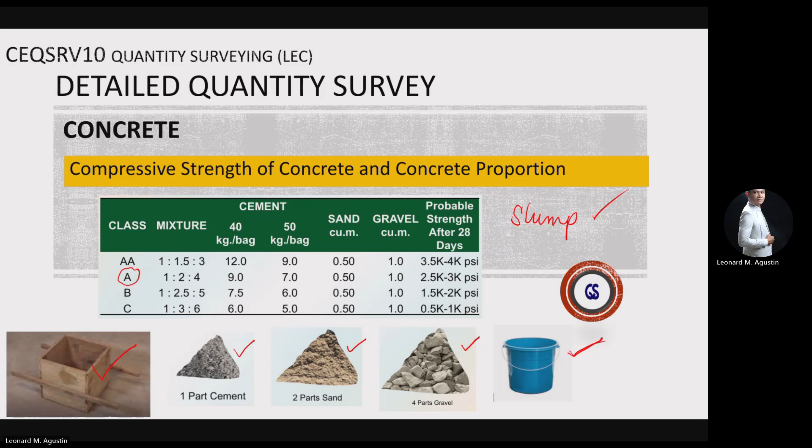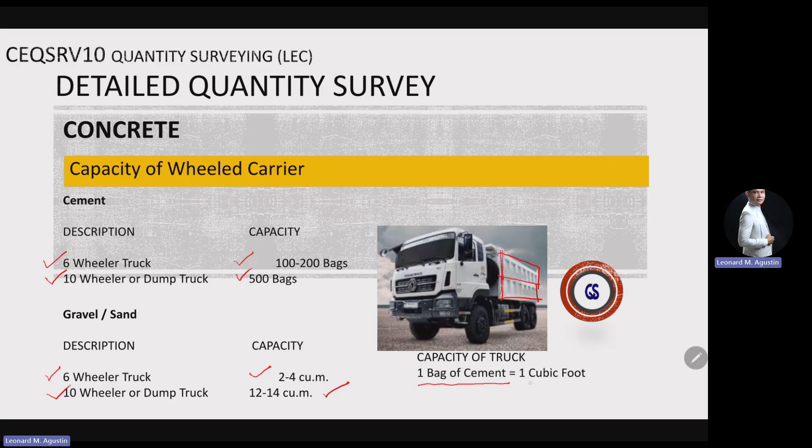So makikita na lang natin kung ano yung proportion dun sa pinaglagyan natin or dun sa container niya. So 1 bag of cement is actually 1 cubic foot.

Dun sa mga lalong-lalo na dun sa mga second taker and also dun sa mga first taker naman, I think alam na natin to kasi yun yung pinakaunang activity na pinagawa ko sa inyo dun sa laboratory. So concrete structure elements, we have your footing, the slab, so SOG or slab on grade or yung suspended slab natin, and then stairs, column, and then beam. Yung beam natin from grade beam, second floor beam, roof beam, and so on.

And if there are any other measurements or concrete structure elements na kailangan nating i-calculate, like say for example, mga parapet, wall, lalong-lalo na dun sa mga roofing natin to achieve a particular design, mga ramp, ano pa ba? So kailangan natin i-include dun sa concrete estimates natin. So note to include all portions below the natural grade line, mga footing, column, walls, and so on.

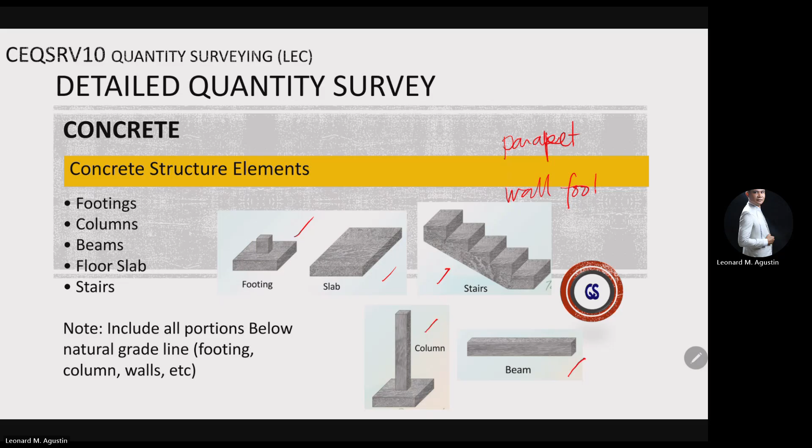Ang kulang pala natin dito is yung wall footing din. So basic lang naman, di ba, yung pag-calculate natin for concrete structures natin. So volume computations muna tayo bago natin siya i-appropriate dun sa proportions na either 1:2:4 na mga cement, sand, and gravel.

So very basic formula for volume of footing, length times width times its depth. So that is for footing. So isolated footing yung example natin dito. And if that's a combined footing, it's just the total length. Say, ito yung columns natin na dalawa. And so on. So very basic yung total volume of concrete calculations natin.

That is volume of footing times the number of footing, based from our foundation plan. Kung nasaan yung mga footing natin, we should count kung say for example, F1 ito, F1 ito, F1 ito, this is F2, F2, F2. So kung ano yung nakuha nating volume...

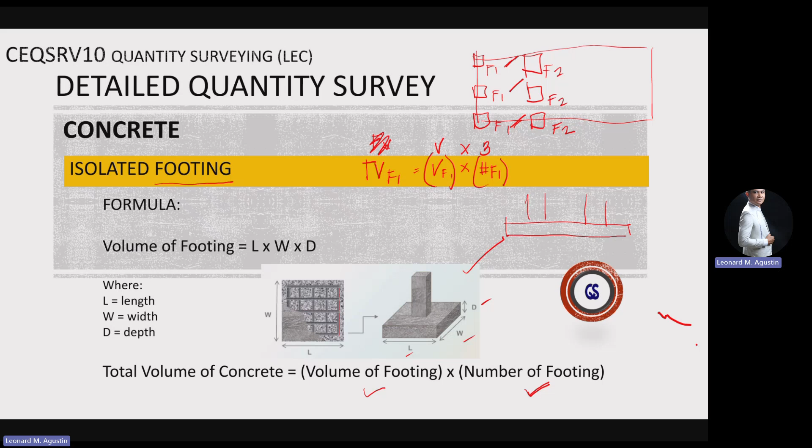So para ma-consider natin lahat ng F1 that is red dun sa ating foundation plan. And then, for concrete wall footing naman natin, basically that is for a hollow block section or any wall na kailangan nating lagyan ng footing underneath. So that's just this section in here: D times W, depth times the width of the footing, times yung length natin. So remember yung length natin.

Say for example, meron tayong mga columns dito. Tapos say for example, lalagyan natin ng wall footing ito kasi meron siyang wall. Tapos grade beam na tong mga nandito, grade beam. So we do not actually need to put wall footing dun sa mga grade beams natin kasi pwedeng dun na tayo mismo sa grade beam magsimula dun sa wall natin. Dun na natin ipapatong yung concrete hollow blocks natin, tapos dun na din tayo maglalagay ng mga abang.

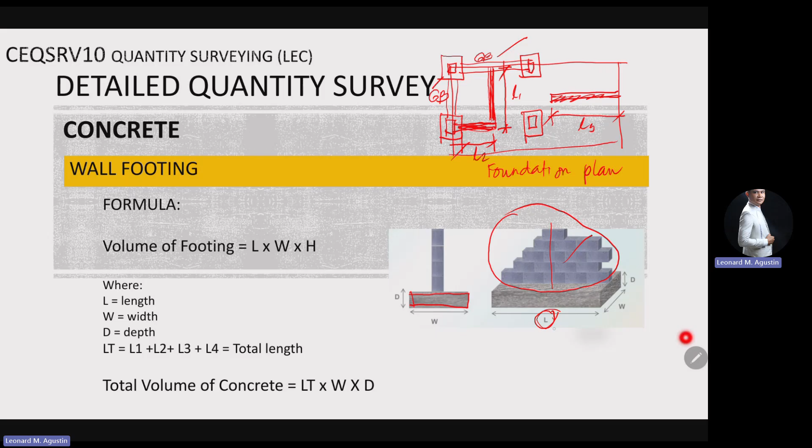So ang magiging length lang natin, titignan natin, i-inspect natin dun sa foundation plan pa rin natin, nasaan ba yung mga wall na kailangan may wall footing. So like say for example, this one, eto yung lalagyan natin ng wall footing. So yung length na yan, i-measure natin itong length na to plus this length. And if there are other lengths na kailangan natin lagyan ng wall footing, i-add lang natin dun sa L natin. So say L1, L2, L3, that will be the total length, L1 plus L2 plus L3. So yun yung total volume of concrete natin: total length times W times D.

To get the volume of our footing.

So wala tayong number of wall footing dito. It is per linear meter. Yung calculations natin dito.

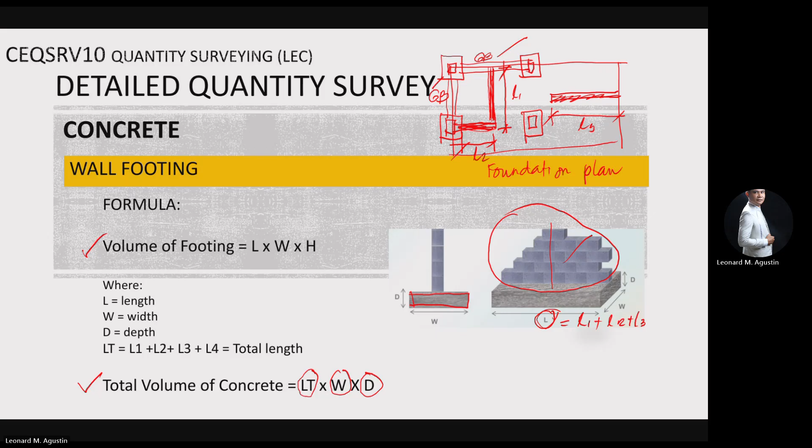So then we have our rectangular column. It's just the section of our column times the height included dun sa calculations natin. Say for example, for this one, if you're conservative enough naman, you can actually have yung full height. Pero kung gusto mong ibawas na yung depth ng beam dun sa taas, so okay lang din.

So it's your decision to make kung ano yung mga nandun sa estimates mo. Anyway, it's just an estimate. Kung baga, bahala ka kung saan mo ibabalance out yung mga kailangang maging saktuhan and so on.

And then, that's the length times the width times the height of our footing. Saan natin makukuha or makikita yung height ng column natin? Say for example, for a particular structure, meron tayong, say, this is actually labeled as C1, F1, this is also C1, F1. Pero ang configuration niya in the elevation, yan, inclined to yan, parang ganyan. So parehas silang C1, pero titignan natin kung ano yung height nito and then this height.

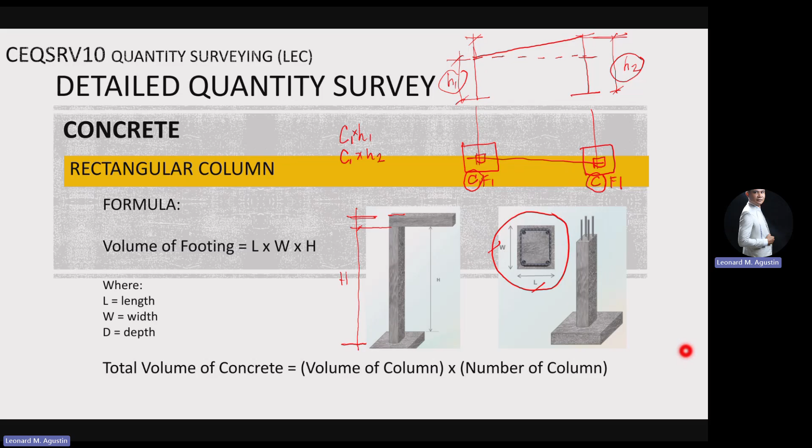So, ayan, take note of the heights dun sa structure natin mismo that is found in your elevations. Then, circular column, same. Height consideration natin kanina, if that is H1 and H2. Tas yung kanyang area of the circle times the height. So that's just the same dun sa rectangular column natin.

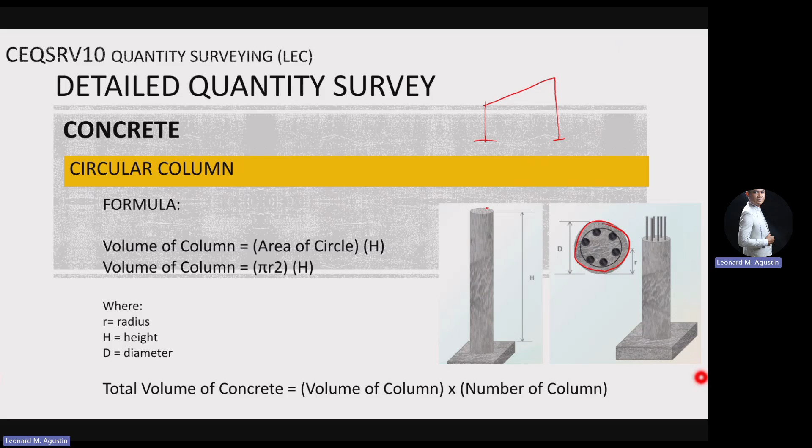Then, concrete beams. Dun sa concrete beams naman natin, makikita natin yan dun sa mga framing natin. You just have to look into kung ano yung, say, B2-1. Ano yung mga width and depth of this one times yung mga magiging length niya. Meron din sa mga framing plan natin actually. Say this is B21, B21 din siya, pero magkaiba yung length. So, you have to take note of that one kasi kailangan i-consider natin pa rin yung length niya.

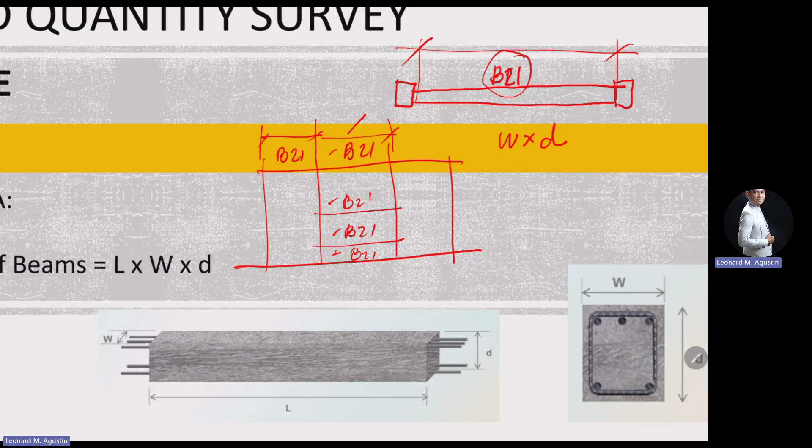Pero kung along this part na B21 lahat sila, B21, consider mo yung length nito times 1, 2, 3. Say, B21 din to, 4. Yan, so that's just times 4, no, for that particular length.

Then, we have your slab. Dun sa slab naman natin, titignan ninyo dun sa, so kapag SOG siya, slab on grade. Meron kasing mga sections ng slab on grade na pag ganito siya. So, kinakapalan dito sa part na to. You'll have to consider some of the parts dito sa ilalim. Pero for simplicity, ito yung calculation ng slab natin.

So, bahala na lang kayo kung paano ninyo itatakal ito. You can actually have your section, i-calculate mo kung ano yung section nitong part na to, which is this one, times 2L times 2W, no? To get the volume of that particular part ng SOG natin.

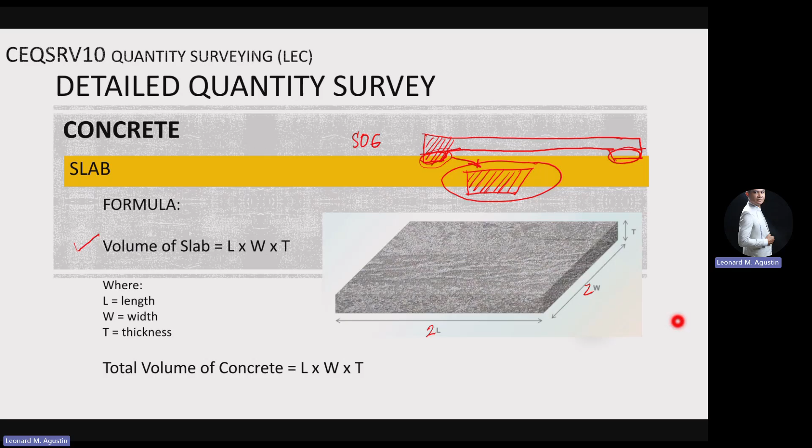Wala namang problema sa suspended slab natin kasi tanggalin na natin ito. Ganito na lang siya. So that's length times width times the thickness, and that will now be the volume of our concrete slab dun sa suspended slab. So madali lang naman ang slab. Ang mahirap lang sa slab will be yung mga rebars natin later on.

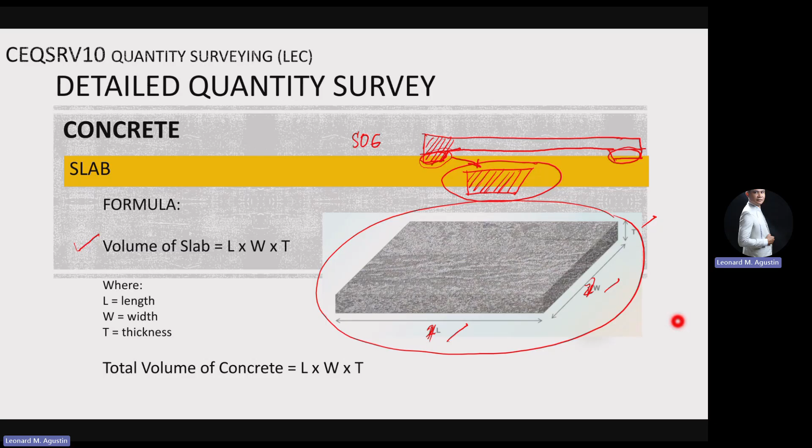Then we have our stairs. Titingnan din natin kung paano yung design ng stair natin. If that's just an ordinary na design ng stair, yung pinaka-typical, eto yung ganitong itsura. Yung pinaka-typical na section ng stair natin. So, we have this triangular part, and then meron tayong parang dito, parang base niya dito, dun sa mga steps natin.

So, height of riser, tread run. That's just the area of this one, yung part na to, times the width. That's the width of our stair. So nakukuha na natin yung volume ng per step natin times the number of steps.

Kaya nakikita din natin dun sa mga plans natin. So, di ba meron siyang 1, 2, 3, 4, 5, 6, 7, 8. May mga numberings na yung mga steps natin kasi hindi na natin kailangan bilangin isa-isa. So, we'll just have to consider kung ano yung pinakalas na number, and that will be the number of steps for that particular stair.

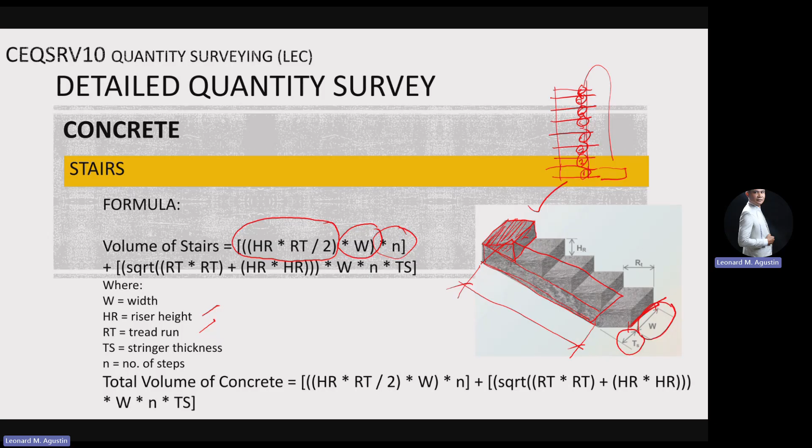So that will be the calculation for concrete stairs. There are also other stairs that are just like that. Then there are some that have a beam in the middle, so it's different from this one. So you have to identify first what the design of the stair is in the set of plans that is actually given.

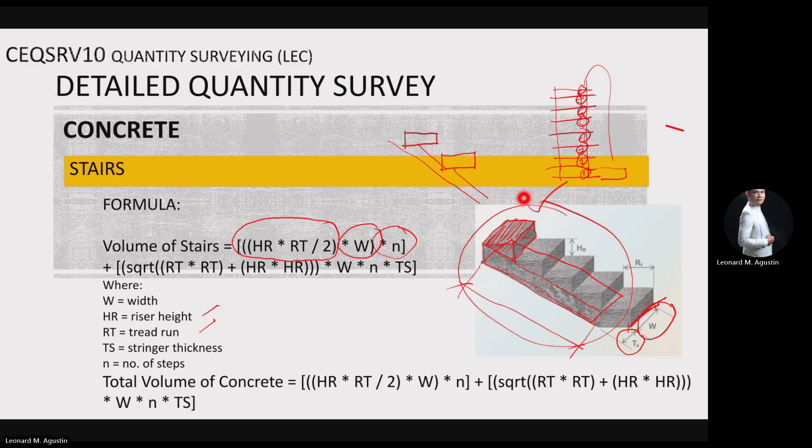So in the calculations of our estimates for concrete, we have to allow for our wastage calculation. We'll have an allowance for wastage, which is actually for formed concrete — we assume 5% wastage. And that is applicable for columns and piers, concrete beams and girders, reinforced concrete slabs and walls, and other concrete members poured inside a form.

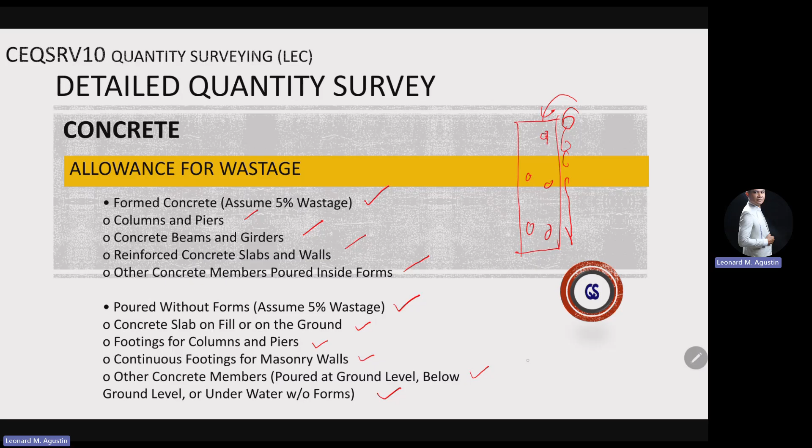So this one is to allow for the imperfection in our pouring. So, for example, for a footing, we can't perfectly make the excavation come up with the exact section needed. It's possible there's cave-in there, so that eats up the volume of concrete — it goes there. Then there are the uneven parts, if the subgrade isn't properly handled well. So that's where the 5% wastage goes.

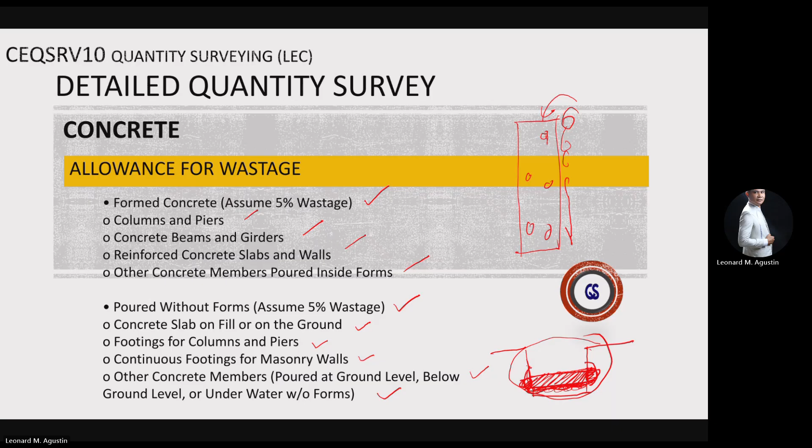So that's just the first step — concrete volume. Then our second step is to add allowance for wastage. Then, ascertain the concrete mixture based on the specification or plan, so we check if it's class AA, class A, B, or C — what mixture we'll use for the proportioning. And then, multiply volumes by the factors indicated to get the estimated quantity of cement, fine aggregates, and coarse aggregates.

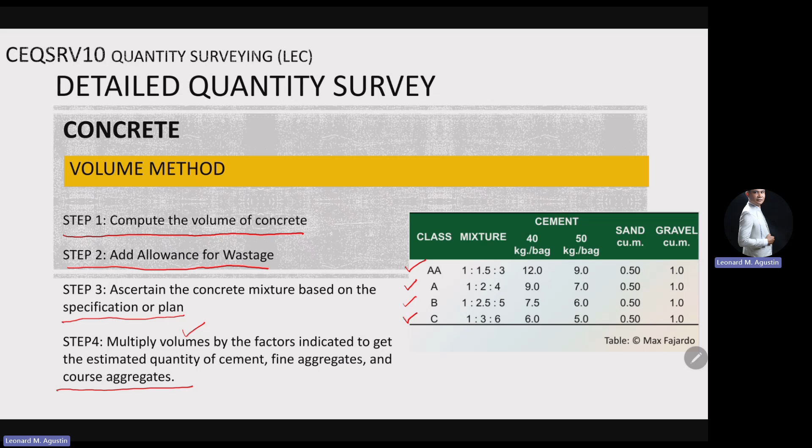So let's try an example. The computed volume of concrete is, say, 5 cubic meters. So add allowance for wastage: 5 times 1.05. So 5 times 1.05 is just equal to 5.25 — 0.25 is what gets added. That could be our allowance for wastage, which could be wasted.

And then ascertain the concrete mixture based on the specification. Say, for example, class A is what we'll use, 2.5 to 3,000 PSI. So now multiply the volume by the factor. So for cement, that is 5.25 cubic meters times 12 kilograms per bag. So that's just 5.25 times 12, which will be 63 bags.

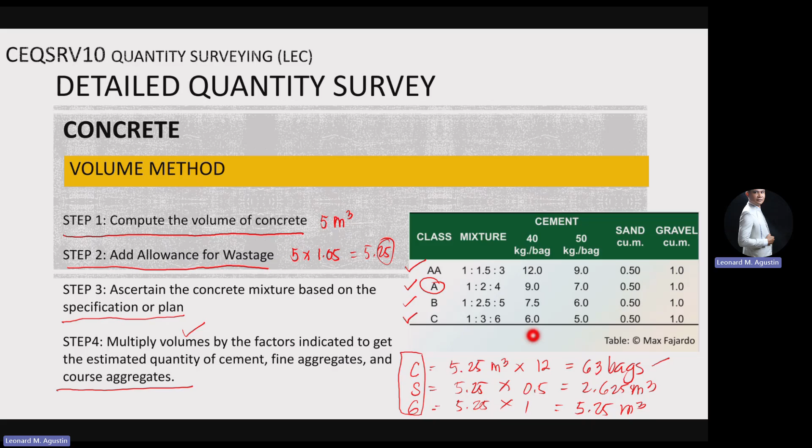Then we have our concrete formworks. So for formworks, when we have wheeled carriers, one truckload of coco lumber for an ELF — those wheeled carriers — is 1,800 to 2,500 board feet of lumber. Remember that lumber is actually sold per board foot. But sometimes, especially when buying per piece, it's priced per piece, not per board foot, but they still base it on the board footage of one piece of wood, multiplying by how much per board foot is the price at the lumber and hardware store. For a 10-wheeler truck, it can hold 4,000 to 5,000 board feet.

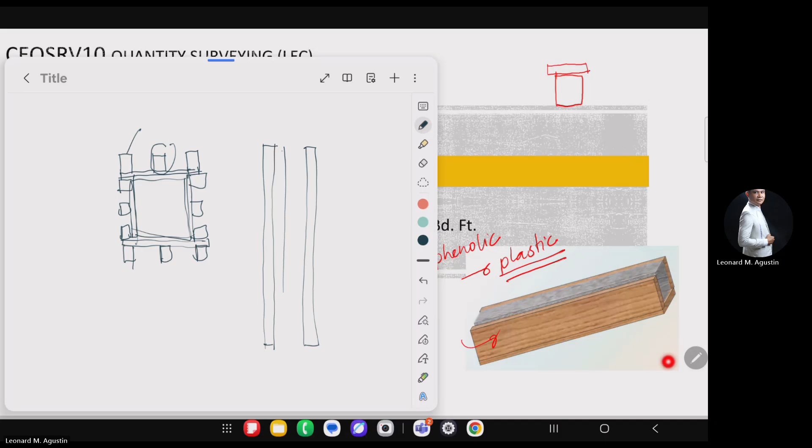So for vertical, lateral ties and braces, we use 2 inches by 3 inches, or 2 by 4. The longer side is exactly sized to support our formworks, since the formwork will tend to get pushed out because the concrete poured into it is quite heavy. So we need the longer side to provide the stiffness of our material - it's either 2 by 3 or 2 by 4.

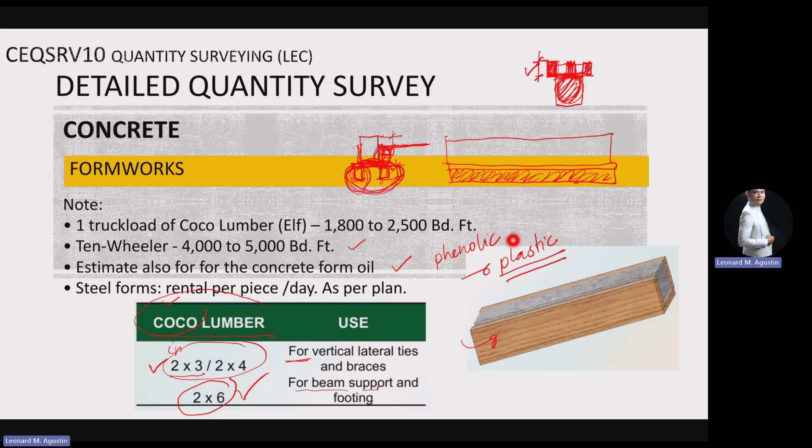So formworks, plywood - for column perimeter. The calculation needed for a column looks like this: S1, S2, S3, S4. So we take this consideration times the height of the column to get the area of plywood needed. So the length of S1 times H gives us an area, then S2 times H, and so on.

You get the total area, then you divide it by the plywood size of 4 feet by 8 feet, and that gives you the number of plywood sheets needed. For beams, it's similar but only three sides - S1, S2, S3, times the length of the beam, then proportion it again to the plywood size of 4 feet by 8 feet.

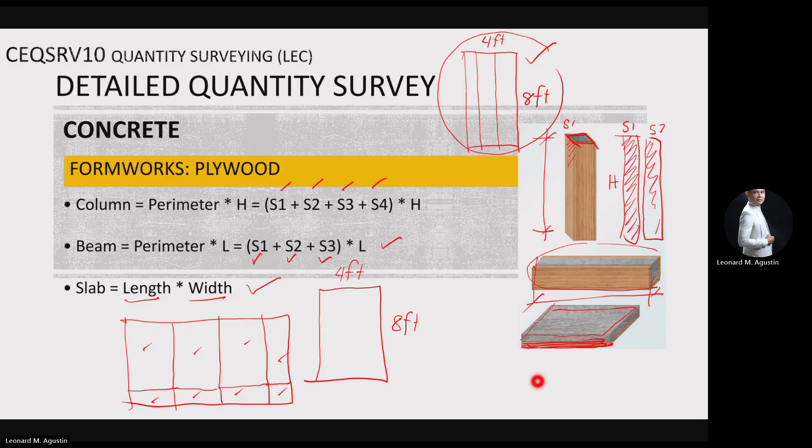So plywood use, kapag 3/8 to 1/2 yung thickness natin. It's not actually advisable kasi very minsan-gamit lang actually siya. Kung magagamit mo siya multiple times, okay lang din naman, pero magsa-suffer yung itsura nung surface nung konkreto mo. So normal market or commercial size is 1/4, pero 1/4 is too thin, so do not use 1/4.

So 3/8 or 1/2 na plywood yung ginagamit for formworks. So our phenolic board is actually reusable. So ito yung black na merong mga normal na naka-print doon, yung mga crocodile design.

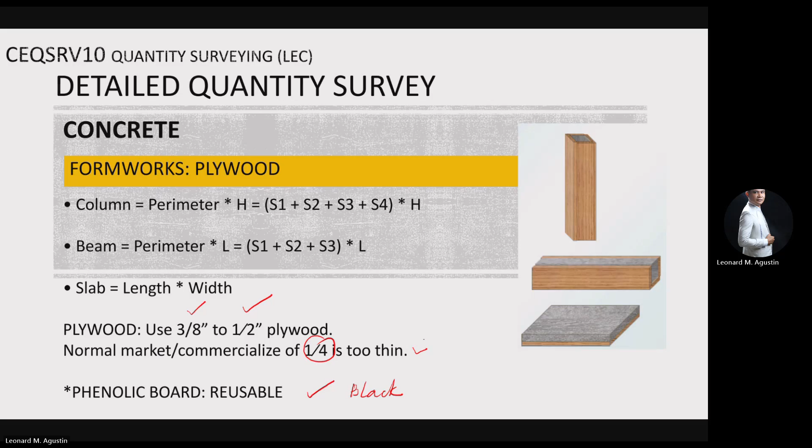So we have our nails. Ang formworks kasi natin, dito na lang, yung formworks natin, ito yung plywood, meron siyang mga ipapako dun sa framing natin. So ito yung gagamitin natin. One box is 20 to 25 kilogram, small, and one box is 30 to 38 kilograms, yung mga large na nails natin.

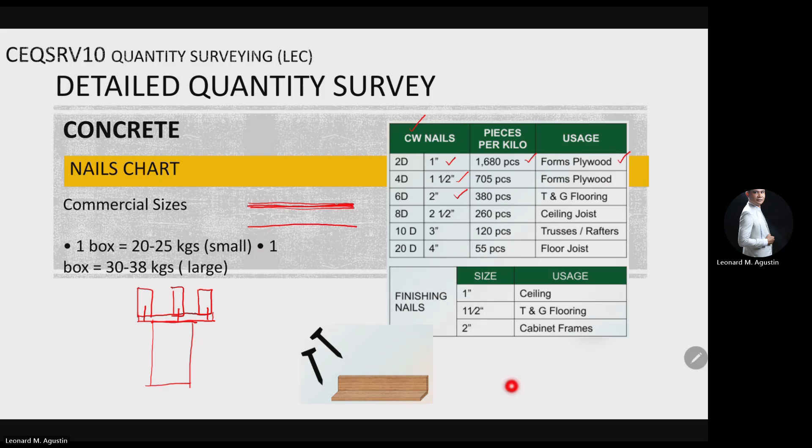So common wire nail, kapag CW, common wire nail siya. Kapag 1 inch yan, that's normally 1,680 pieces. This is used for forms na pang plywood of 3/8 or 1/2 inch. Pero medyo maliit na siya, yung 1 inch, kasi konti na lang yung papako dun sa lumber natin, so it's either ito or yung DOS na siya. Tapos yung DOS, kapag gumagawa, ito yung lumber natin, ito yung plywood natin, pinapako lang siya ganyan, and then yung matitira dito, ibe-bend na siya para mas kumapit yung plywood.

Pero itong table din na to, this is for general use of the nails. Pwede natin gamitin for forms, and then tongue and groove na flooring, ceiling joists, trusses, floor joists. Ito yung mga sizes na kailangan nating i-estimate.

So how do we actually estimate yung mga paggamit ng nails natin? Titingnan natin kung ilang piraso yung papasok dito per piece natin, tapos bibilangin lang natin. That's direct counting ng nails na kailangan natin.

This one is common wire nail, ito yung may ulo. Ito naman, finishing nail, ito yung maliit lang yung ulo, parang medyo pabilog. So that is generally used para sa mga kailangan makinis yung surface, kasi kapag merong ulo dun sa ceiling natin, tatakpan mo pa yun ng masilya or yung parang pang tape para hindi siya makita, then mamasilyahan ulit.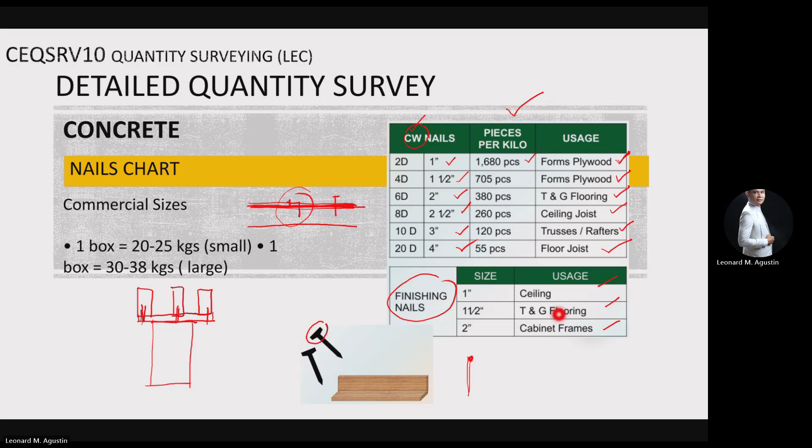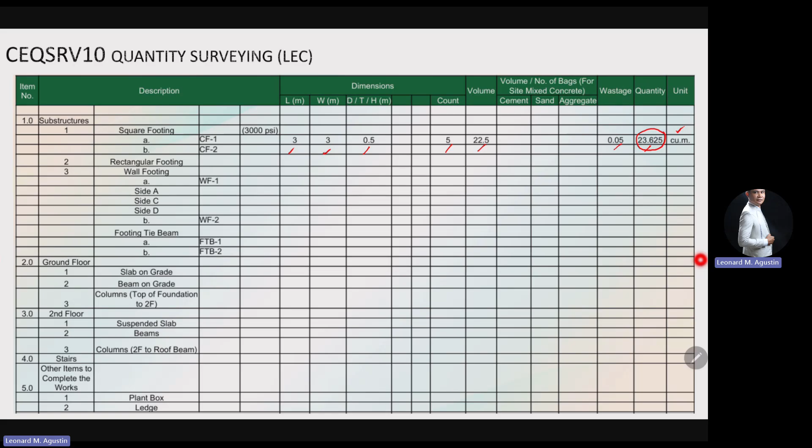So this is an example of our computational sheet. Square footing, rectangular footing, footing tie beam, length, width, yung thickness, yung count, then makukuha mo yung volume. And then times the wastage, quantity, and ito yung total quantity natin, and the unit in cubic meters.

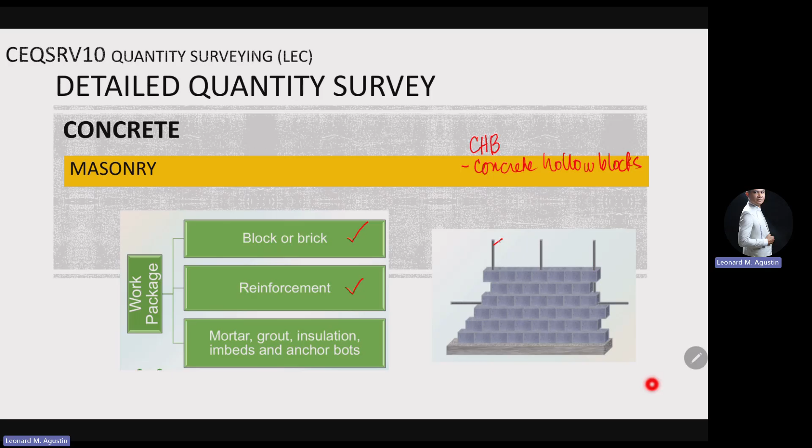So let's go to masonry. Normally, mga CHB or concrete hollow blocks, yung pinaka-common na ginagamit natin dito sa Philippines. So yung work package ng isang wall na yung civil works pa lang niya is yung CHB natin, yung block na gagamitin natin. Then we have yung reinforcements niya, then we have yung mortar. Yung mortar natin is yung sinusuksok dun sa mga hollow portions nung CHB natin. And then, grout, insulation, embeds, and anchor bolts.

So kung mga kailangan na lagyan ng mga ganito, pero yung mortar, yung pinaka-common na kailangan natin sa CHB wall, and that is considered in our masonry calculations.

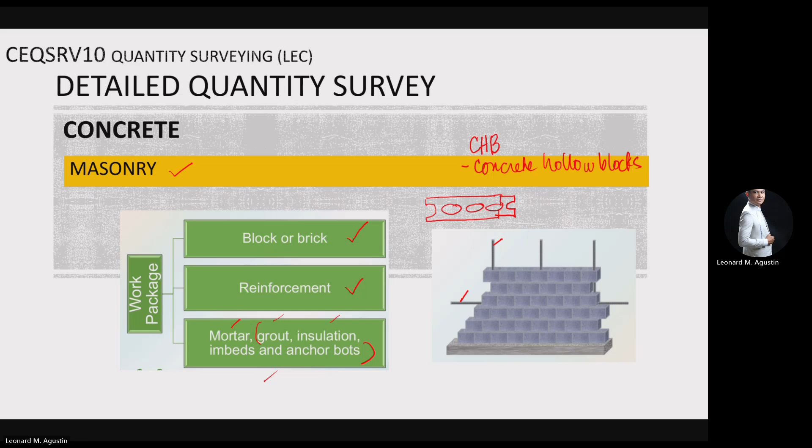So a hollow block is a 3-core block. Depende dun sa thickness niya at width, itong W, so that's 100, 150, or 200. So 100 for interior walls, 100 to 150. Tapos 200 for exterior walls and also for mga plumbing walls. Bakit kailangan natin i-200 yung plumbing wall natin? Say for example, if you have your wall with this thickness, tapos kailangan mo mag-embed ng pipes dyan, you can actually conceal them dyan sa wall na yan para hindi asiwa yung mga plumbing pipes natin.

So to have the calculation of how much CHB yung kailangan natin, we have to get the net CHB area. So for this example, we have our length times height, makikita nyo yan dun sa elevations, sa architectural, dun sa plans. Tapos ma-minus lang natin yung area ng window, and then area ng door, so that is now the net CHB area. Kapag wala namang opening, or these are called your openings. So number of CHB needed, eto minultiply niya sa 13. Saan nanggaling yung si 13? So if we try to look per 1 square meter, yung normal height kasi ng CHB natin is nasa 0.2.

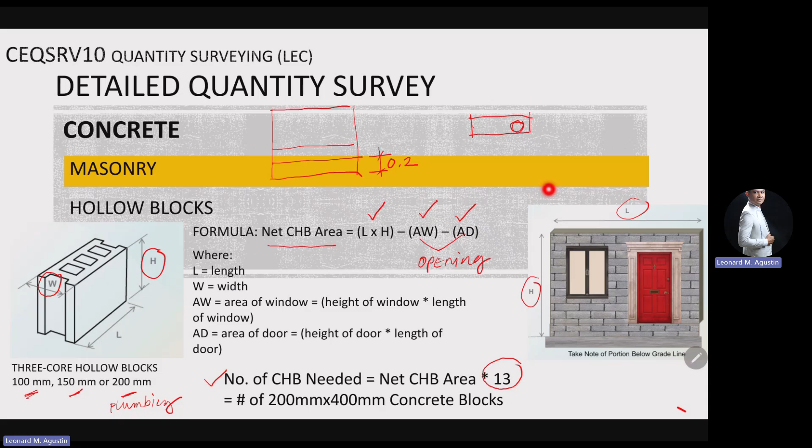So 2, 4, 6, 8, 2, 4, 6, 8, so 1 meter. Tapos, ang normal length natin is 0.4. So 0.4 plus 0.4 is 0.8. Tapos ang matitira dito is 0.2. That's basically 2.5 na CHB per layer.

So kapag binilang natin to, this is 2.5, 2.5, 2.5, 2.5, 2.5. And that is actually 12.5 pieces ng hollow blocks. So kaya 13 ito, ni-round up na lang.

Yung consideration dun sa kalahati is, hindi na siya binasag, no? Pero pwede mo namang gamitin din yung 12.5. Kasi say for example, malaki yung CHB wall natin, ilang metro yan. Say for example, ganyan, so ang consideration dyan is, tig-isang square meter ito.

So meron kang kalahati dito, meron kang kalahati dito, meron kang kalahati dito, meron kang kalahati. So ito, isang buo na to, yung nadagdag dun sa calculation mo, kung ilang tig-dalawa. So say 10 CHB yung nadagdag, no?

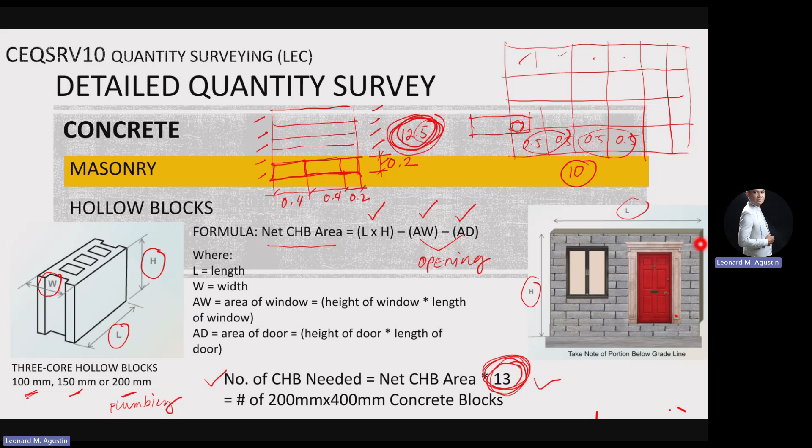So that is your hollow blocks wall.

So yung cement mortar for laying of concrete hollow blocks natin, itong mga to, meron tayong class A and then class C. This is for the sizes na 200 by 200 by 400, 250 by 200 by 400, 100 by 200 by 400. So kapag nakuha na natin yung number of CHB, i-multiply lang natin dito sa factors na to for this size. Ito yung factor natin for the bags of cement kapag class A yung kailangan natin na mortar.

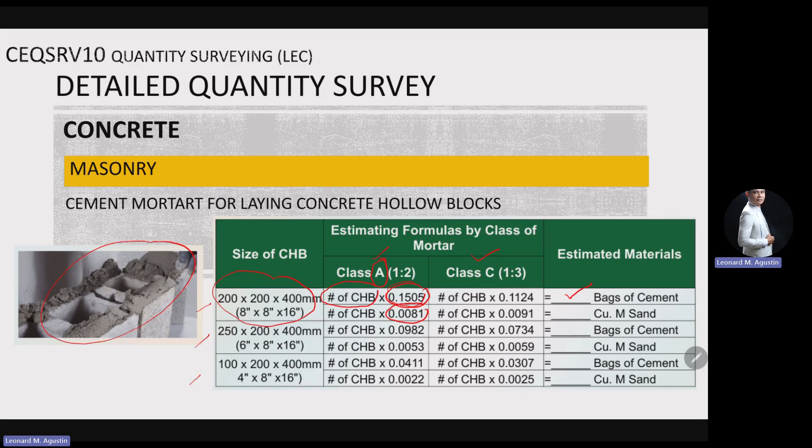So halimbawa, dun sa calculation natin ng wall, let's try to have a wall example here, 3 meter by 2 meter na wall. So that's just 3 times 2, that is 6 square meter. Dun sa 6 square meter natin, i-multiply natin ng 12.5. So yung factor na ginamit ko is 12.5, gusto kong gamitin yung 12.5 for this project. Times 6 is 75 pieces.

So sasalpak ko doon, say ito yung gagamitin natin. 75 times 0.1505, that is 11.2875 bags of cement. So approximately, gawin na natin 12 bags.

And then cubic meter of sand, so that's just the same, pero yung factor natin is 0.0081. So that is 75 times 0.0081, that is 0.6075. So 0.7 cubic meter, or pwedeng gawin na natin siyang 1 cubic meter of sand. Yan. So ganun lang yung pagkuha based on the class of mortar.

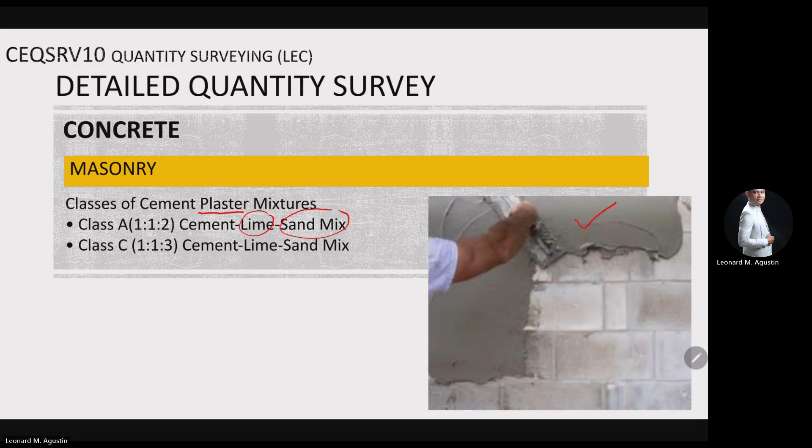So dito naman, ito yung calculations natin for a 10 mm na thickness ng, say, ito yung wall natin, thickness ng plastering. Yan, so ito, 10 mm, 12 mm, 20, 25. So surface of concrete and then constructed in forms. Ito yung mga class A and class C natin.

Plastering area times etong mga factors natin na ganito. So yung mga yan, para makuha natin yung bags of cement, bags of lime, and then cubic meter of sand. Hindi lang magkaka-align yung mga nandyan, i-align nyo na lang. Anyway, magkaka-align naman siya per row.

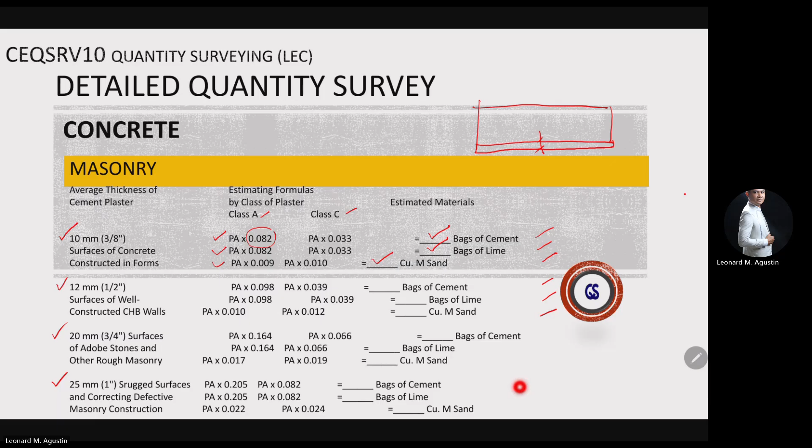So say for example, for a wall, let's have yung 3 by 2 ulit, so that's 6 square meter. So ano yung consideration natin? Area lang nito. Tapos, for a 10 mm na thickness na desired natin na thickness for the plastering, ito yung factor natin. So that's 6 times 0.082.

Then 6 times 0.082 din for the lime. 6 times 0.009 for the sand. That is 6 times 0.082, that is 0.492. This is 0.492, and then this is 0.9.

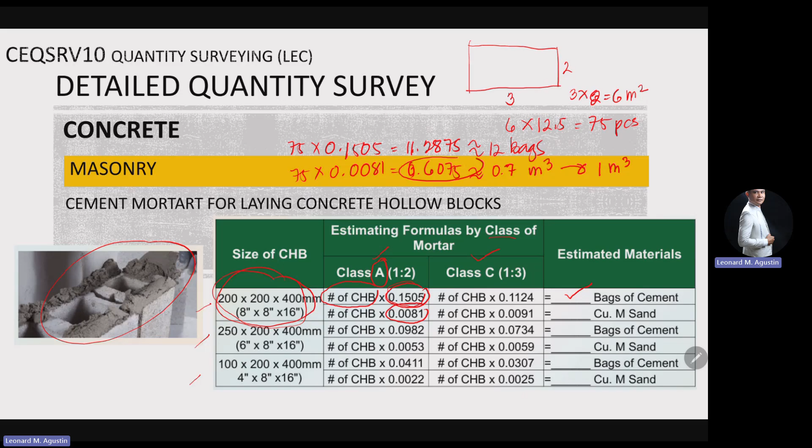0.054. So ayan, idadagdag na natin yan dun sa calculation, say dun sa nakuha natin dito. Kasi sand ito, di ba, dun sa mortar natin. Para ma-order natin ng minsanan.

So ito yung pwede nating gamitin na format for the calculations of our wall, for kung ilang CHB siya. So wall A, and then for the mortar, and then for the plastering.

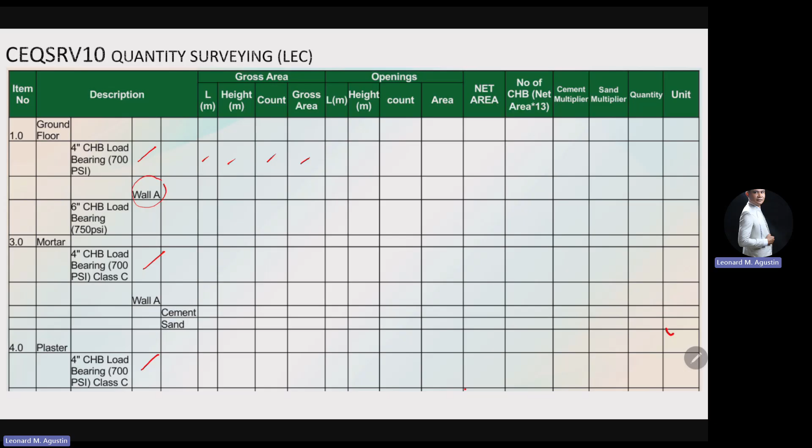So kailangan natin ng length, height, kung ilang piraso, kung may magka-identical gross area. Na-discuss natin kanina yan. And then openings, if there are openings na ibabawas. So yung mga openings natin, this is to be subtracted. Tapos makukuha natin yung net area, number of CHB.

So from the number of CHB, dun tayo magbe-base, di ba, dun sa calculations natin. And then makukuha natin yung cement multiplier based from the specifications, kung class A or class C. And then sand multiplier natin, makukuha din natin from class A or class C. And then we'll have the quantity and then our unit.

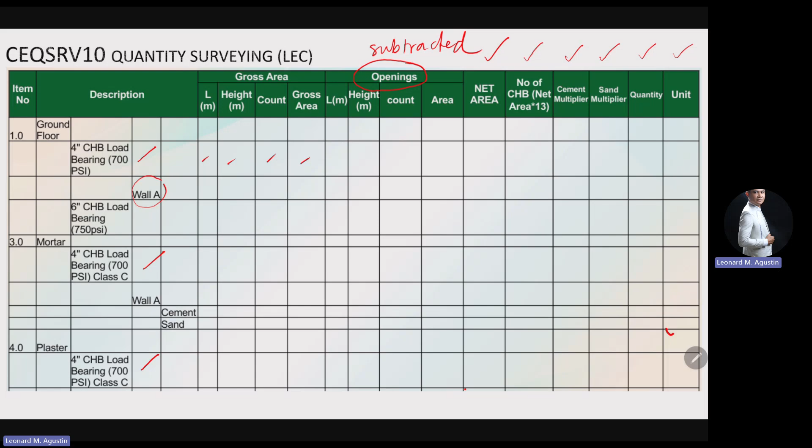Ayun, end of slideshow.

Okay, so ayan, that's one part ng detailed estimates natin. So I'll just have another recording for the next detailed estimate natin.

So in here we have tackled yan, mga concrete volumes, nails, formworks, masonry, including yung mortar and then plastering natin. So that's just roughly yung mga para sa bill of materials natin.